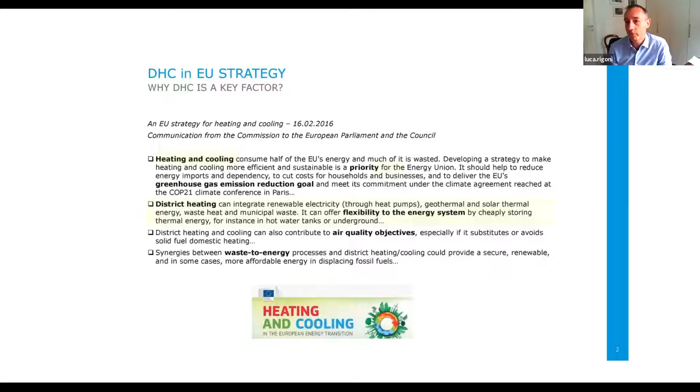We are now in a process where we have to fight against the climate changes. We have already increased our temperature by one degree, and we have to fight against the decarbonization of the sector. District heating can play a very important role, especially because it allows flexibility of the energy system, allowing the recovery of waste heat which is already available in the territory and is definitely not used. Obviously, district heating plays an important role in that part.

We can move on. The transition passed through the fourth generation district heating, which is also the one applied by A2A, and is really the major player in the recovery of waste heat.

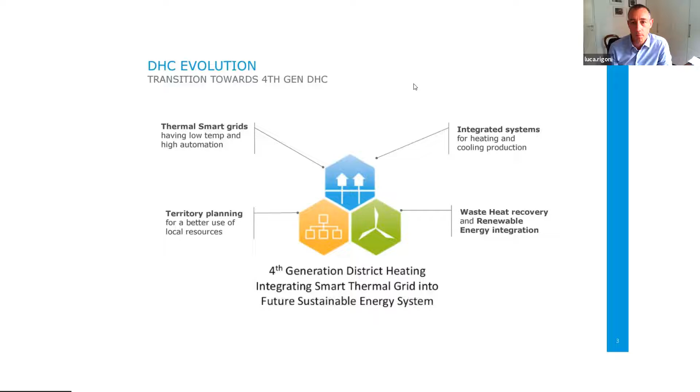Moving to the next slide, this is the definition. I would not spend a lot of time on that. The fourth generation's key point is really to allow higher efficiency, higher flexibility, and also the facility to integrate renewables and waste heat into the district heating.

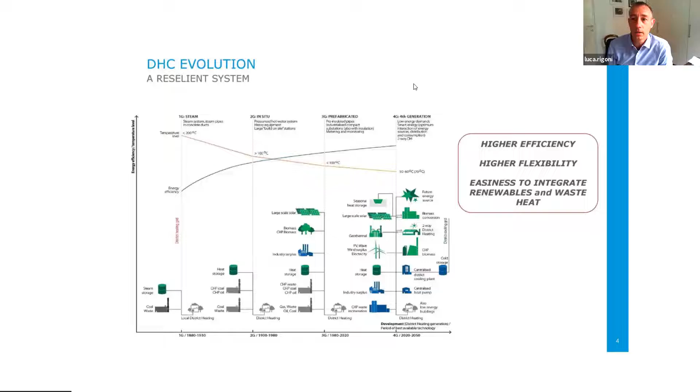And we are moving in that direction, as you will see from some cases I'm going to present in a minute. Next slide. I'm coming to this quickly - a result of the Stratego project, which was presented and developed in 2016.

This is a study with a scope to develop a low carbon heating and cooling strategy based on a heat density concept. This study mapped a certain area, especially where we have quite deep mapping of the area where our network is installed, in Milano, Brescia, and Bergamo. Through that, it's quite interesting to mark the fact that the target of this scope was also to establish or evaluate the potential of the waste heat available in the territory.

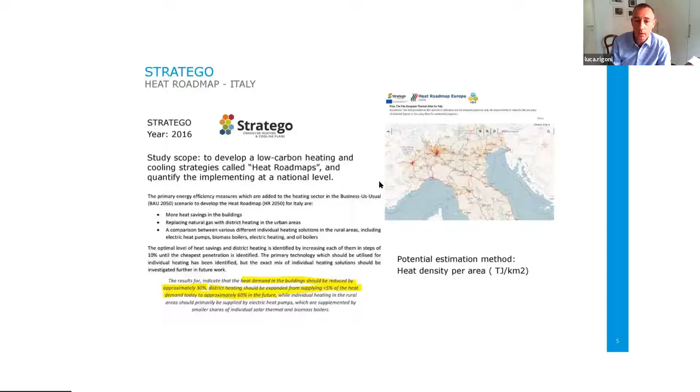Move to the next slide, please. Coming from that, you will see the numbers are quite impressive. The result of the study says that in Italy, in terms of industrial excess, we have around 95 terawatt hours per year which are now dissipated in the atmosphere but can be recovered. So it's really a huge flow of waste heat which is available, and just some of this heat is really ready to be grabbed.

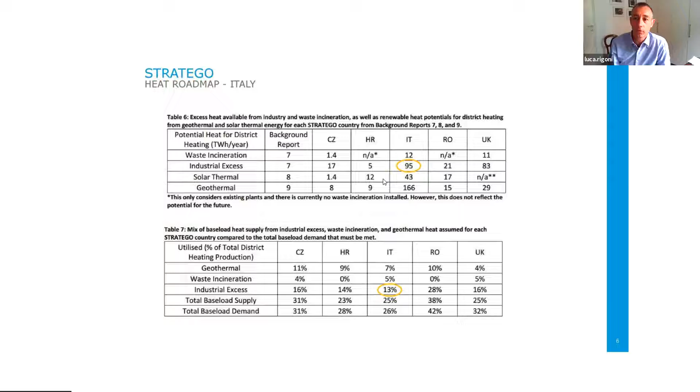This study gives us some sort of a guideline, a light in the night, showing where we should focus our direction in order to try to recover this heat. So coming to the next slide.

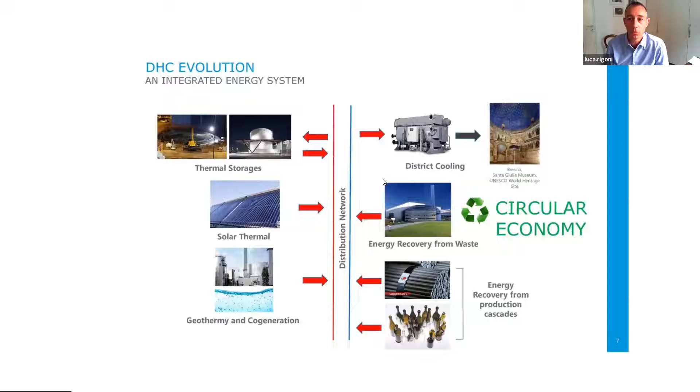Our system currently is already fed by a lot of different technologies, starting from thermal storages, solar thermal, geothermy, really recovery from industrial and production cascade, from waste to energy units, and we also couple the district heating with district cooling. Our system is already designed to accommodate all these contributions. Coming to the next slide.

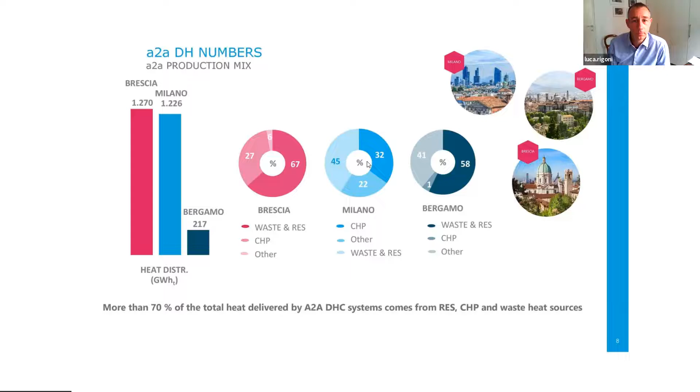So now let's see the cases which allow this high percentage of heat recovered above the heat distributed to our network. The first one is a project that we are now delivering in Bergamo, the third biggest city in Lombardy and one of the biggest in Italy.

We have set an agreement with REA, a waste-to-energy producer. This contract says we can recover all the capacity they currently have in terms of waste heat and deliver it to the district heating. The plant has been in operation for many years, but they don't recover any heat. They have an air condenser and basically discharge all the heat to the atmosphere.

Through this agreement, with a new steam tail, a new part of the plant installed and built, we are able to recover all the heat that is now condensed to the air. To do this, we have to install a 5-kilometer pipeline routing the heat from the production center to the city of Bergamo, which is not far away.

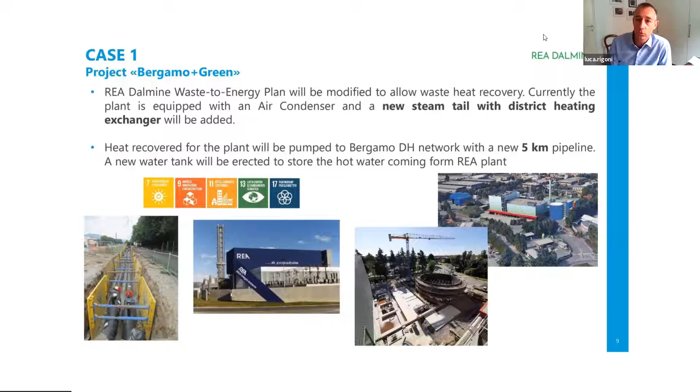We can move to the next slide. So the project, basically the value of the project is around 15 million euro in all.

The major KPIs are the fact that we will be able to increase by 50% the heat available for district heating in the whole city of Bergamo because of this heat recovery. We are going to install 22 kilometers of pipe in the city, and increase around 11,000 flats served because of this recovery.

The major numbers are, as I said, 15,000 tons per year in CO2 emission savings, and we are going to recover more than 90 gigawatt hours per year. You can see the equivalence in the lower part of the slide.

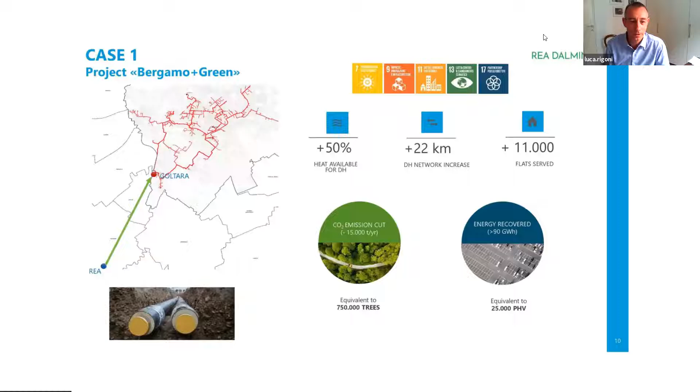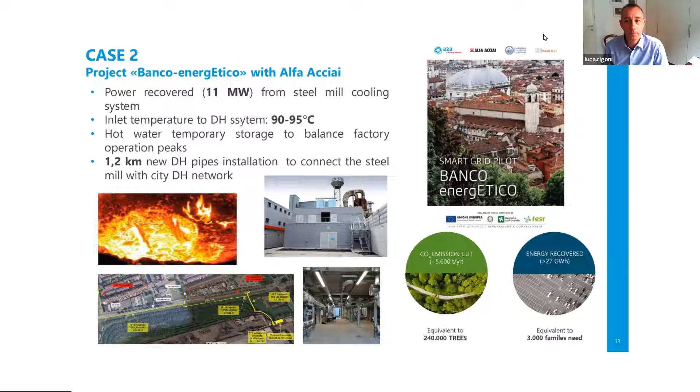Okay, we can move. This second one is again an industrial recovery, a heat recovery from a steel mill. We are going to recover 11 megawatts in terms of power, which will be around 27 gigawatt hours in terms of energy, with a CO2 cut of around 5.6 kilotons per year.

This is really a showcase project because we are recovering the heat as it is without any lift. We're recovering a 90 degree flow without making any lift to a higher temperature, and we are pumping this heat at this temperature level into our district heating system as it is.

The project considered installing, again, 1.2 kilometers of new district heating pipes to connect this steel mill, and a big pumping station in order to balance this flow into the network. This is the real challenge, because our network is at 120 degrees.

Because of this, we are really trying—if you remember the first slide—moving to a lower temperature network in order to push on this type of recovery, which is normally at a lower temperature. You can move to the next slide.

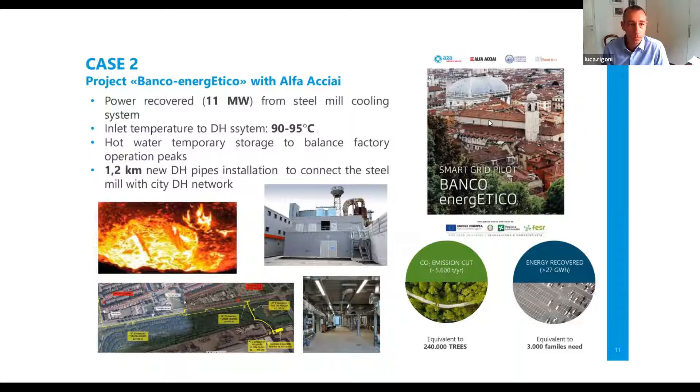Move to the next slide. Okay, I can see it. Okay, now I see it.

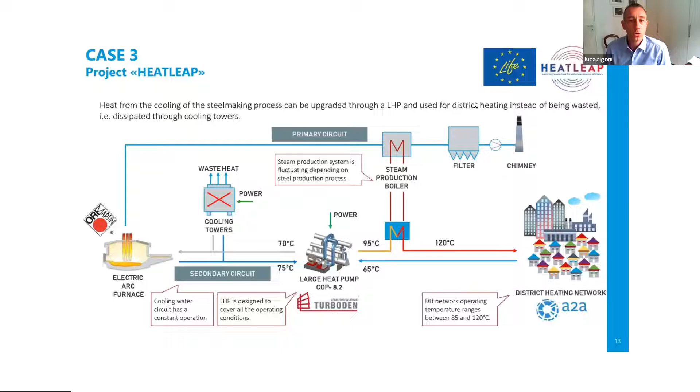So this is again a heat recovery from this steel mill factory, but different from the previous one I showed you: here we need a lift of the flow that we are recovering. In this case, the temperature of the cooling system is lifted through a large heat pump from 70 degrees to 95 degrees, and then with another system, we lift it up to 120 degrees, which is the temperature of the district heating network connected to this steel mill.

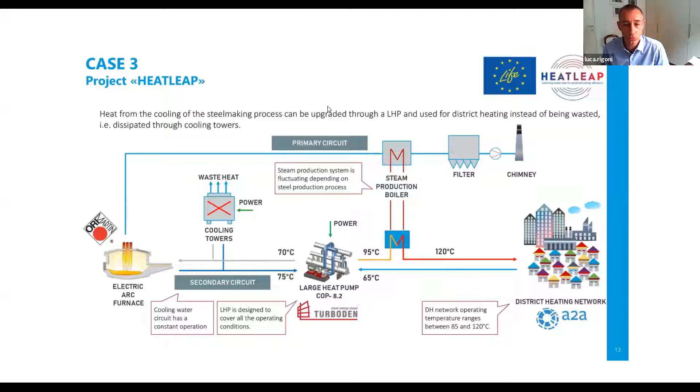But the concept is still the same: we are recovering the waste heat used to cool the process of steel production, and instead of throwing it away through cooling towers, we are recovering it and increasing the temperature in order to allow perfect integration into our system. You can move on.

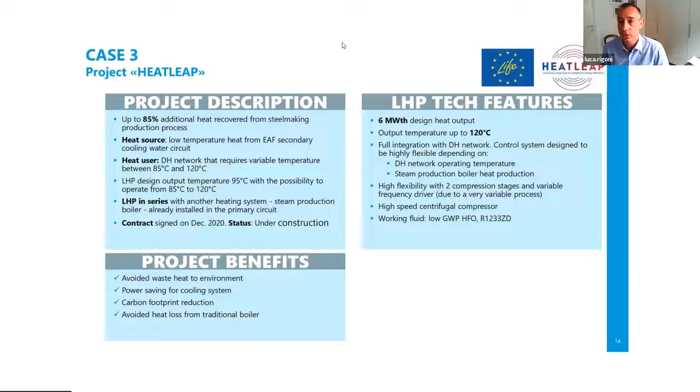As I said, these are the major KPIs. We are talking about 6 megawatt power, and in this case we are lifting up to 120 degrees. The important thing is that we are recovering nearly 85% of the heat produced by this steel making production process. So we are really reducing to a minimum the waste heat which is left to the ambient. Okay, you can move on.

All this kind of project requires flexibility from our side. The flexibility, as I was telling you before, can be done through a water storage, a heat storage. The heat storage is really a key component in order not to create any concern or any interruption to the industrial process which is above our recovery. And this is the reason why we are investing a lot of money in erecting new heat storages in all our network.

We have selected an atmospheric heat storage concept, which means that we will be storing at a temperature of 95 degrees maximum, because again, our aim is to reduce as much as we can the network temperature. And we are investing a lot in order to increase the capacity of storage.

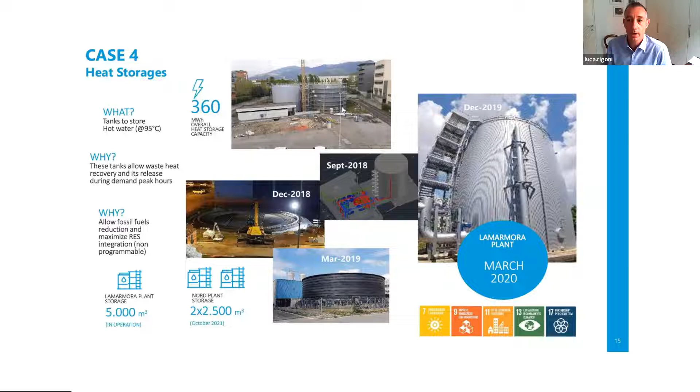Consider that now in Brescia, we are erecting 3 water storages, which in total will have a capacity of around 50% of the overall volume of the network in Brescia. And in Brescia, our network is quite spread. We are talking about 670, 700 kilometers of pipe in the whole city. So really, we are increasing our capacity a lot.

Then I come to the last case very quickly, which is quite interesting. This is a geothermal heat recovery. In Milano, we have some wells which are intended to control the level of the underground water, and the aim of these wells is to pump water from the underground and put it into a river. These pumps flow every day, 24 hours per day. So we have a huge flow of water thrown away without any energy recovery.

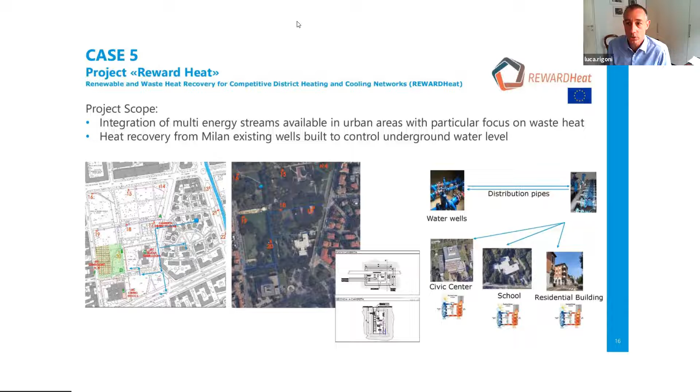So the idea is to use a part of this flow as a geothermal sink. We are now executing this project, which is again financed by the EU community. We hope to present the results in the next meeting, because we are now in the design phase and starting up with this new project. And I think this is the last one.

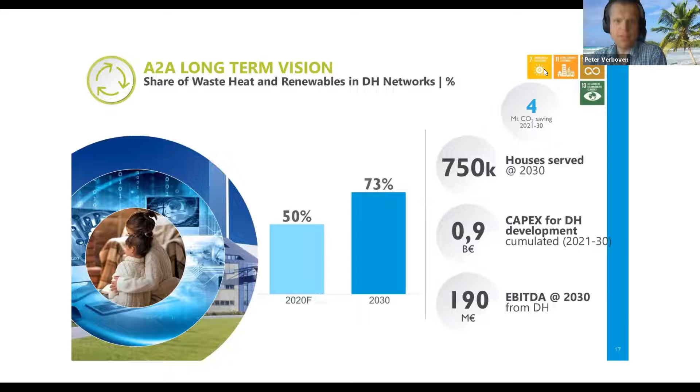Thanks a lot, Luca. As I said, very interesting overview. Very clear, covered all aspects, I think, of district heating and cooling. And I'm really curious to hear what Gilles is going to tell us about the case in Ghent, in Belgium, and how it compares to what we've seen in Bergamo.

Thank you, Peter, for the introduction. Indeed, a very interesting presentation by Luca. He has a lot of networks already in the ground. Here in Zelzate, we still have to start, so we have 0 meters of district heating in the ground so far. My name is Gilles Kinget.

I work at the Regional Development Agency of East Flanders, one of the 5 provinces in Flanders, and Flanders is one of the 3 regions in Belgium. So that's a complex introduction. As POM East Flanders, we try to be a catalyst within the energy transition. We initiate these projects. The basic idea is to couple supply and demand of heat. So in this sense, we have a lot of overlap with the R-ACES project and also a shared interest.

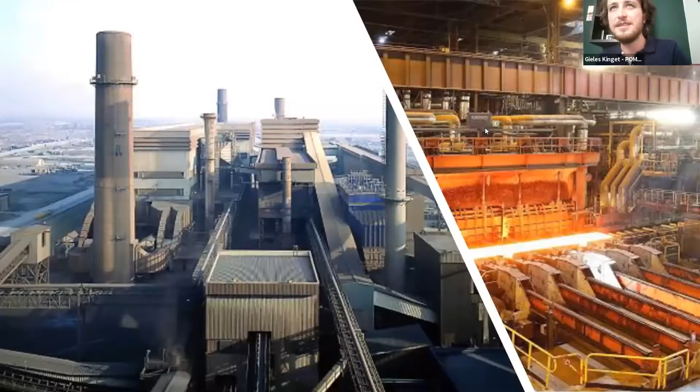ArcelorMittal, on the other hand, and I think you can go to the next slide, is really a very large company, 850 hectares. I think it's even bigger than the municipality of Zelzate. They are a fully integrated steel manufacturer. So they start from the resources, from the ores, just up until the steel end products. 3/4 of the CO2 emissions of Ghent are caused by ArcelorMittal. So it's really key of their process, of course. They are very carbon intensive.

And the vision of ArcelorMittal is to treat carbon not only as a fuel, but also really as a resource. And they have a lot of projects initiated, also financed by Europe, in which they try to make nice products out of these carbon emissions. Peter was talking about industrial clusters. Well, I think ArcelorMittal is a cluster on itself. So what we try to do here is to combine these two, the big giant ArcelorMittal and the small Zelzate, and then you could think of the next image, David versus Goliath.

We as an energy broker and a regional public authority try to help Zelzate to level out with this big giant, but I think this would give you a wrong starting position, using this image as a conflict between two parties. If you hold on to this, you would drastically limit, I think, the chances for a success due to a lack of trust. So rather, I would give the next image, which is, I think, very crucial.

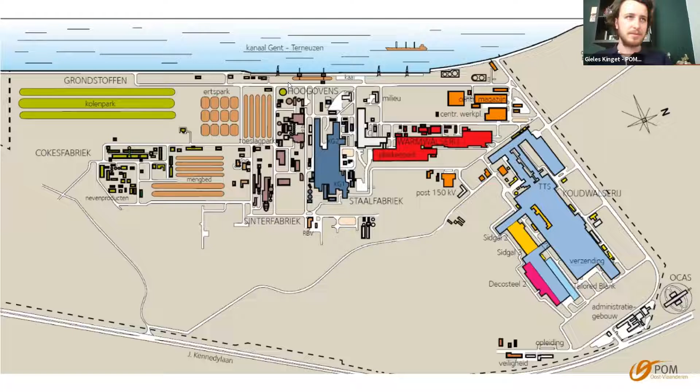And from time to time, we also involved some of the major developers of heat networks, really to have a sort of ping pong in an early stage to screen the viability of what we were saying and sometimes also promising. Next slide.

So after this first phase and getting to know each other, try to build this confidence, we started collecting data. I think that's, of course, the main ingredient. You cannot build a heating network if you don't have the demand for heat. So that's what we've done here. The biggest dot is a psychiatric centrum, Sint-Jan-Baptist, which is very close to ArcelorMittal, which is just on the south. You can see some contours of their buildings approaching there.

Next slide, please. After we've collected the data, we asked an engineering company to put out a feasibility study. So we said, try to make the dimensioning of the pipes, the trajectories, and here you can see some key figures also about the external heat delivery, because ArcelorMittal, next to this feasibility study, also did an internal study to see what sources can be used to deliver this heat network, at what temperatures and at what cost.

And that's when they come up with two, let's say, starting points, 2 times 10 megawatts of the place where they squeeze the big hot steel slabs, they call it, to cool these rollers. Otherwise, they would also melt. So that we had our source, 2 times 10 megawatts.

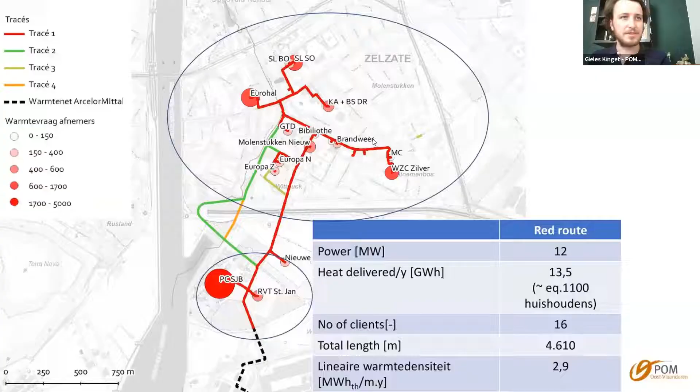I think those were the most, let's say, important obstacles that I've noted here today. I'm curious to your questions or any suggestions.

Yeah, thanks a lot, Gilles. This is one question from my side. What's the exact status right now of the project? So what stage are you in?

ArcelorMittal Ghent is putting out the request for quotation. So it's a design, build, maintain, part financing and operate all together. And they are in conversation with different parties, but they will now officially put out these requests for quotation. So that's for the network on their side. It's not for the overall network all the way to Zelzate. It's for the network on their side, the network to the psychiatric center, and also within this RFQ, they will implement the possibility to deliver to Zelzate as well. So ArcelorMittal is really thinking with us, they have to deliver and let the network grow towards Zelzate. So that's a positive thing.

I see another question here from Emilia, who's asking what happens with the waste heat outside the heating season.

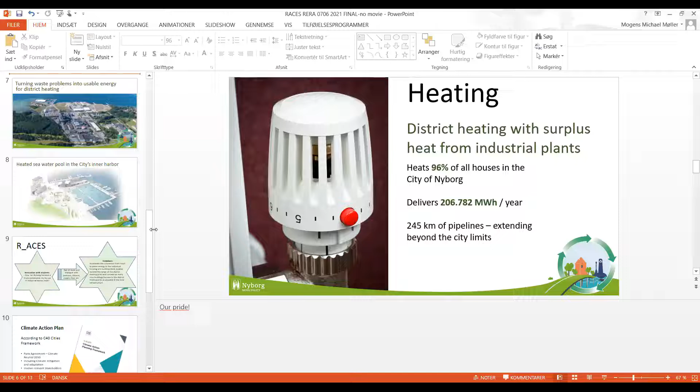Okay, just to give you a short introduction. You all know the map of Europe and Denmark, and the red dot is right on Fyn, which is the region we are positioned in. Nyborg municipality is a small municipality of 280 square kilometers, on one side of the Great Belt Bridge, if you know that one, with a population of 32,000, out of which 20,000 live in Nyborg city. Our main businesses are industry, agriculture, and education. So that's just to zoom in and give you an impression of where we are.

It's also a municipality with a strong international commitment. I started 1 month ago, but as I said, I've been cooperating with Nyborg for a number of years. It has signed the Covenant of Mayors, we're part of the Cities Race to Zero, and we were finalists in the European Green Leaf Award this year. We didn't win it, unfortunately. Recently we've also entered a national process called DK2020, which is building climate action plans along the criteria of the C40 cities concept, if you know that, I'll come back to that.

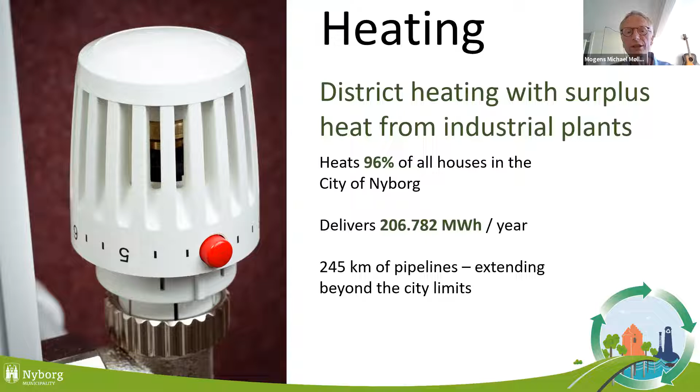So the surplus heat comes from roughly 2 companies, as I said. One is Fortum. Well, now it's owned by Fortum, but it was built as actually a public company back in the 70s, and they're still taking care of hazardous wastes from all over Europe and actually all over the world. It's transported to this plant where it's burned, and a lot of the wastes are actually fuels themselves, or they are destroyed by other means and by use of other fuels. So this is one of the main plants, and even back in the 70s, wise people built the system so that the surplus heat from this plant could be used in the district heating.

The other company is Koppers, which is a tar facility, an oil product. These two companies supply 96% of the heat. The city of Nyborg only has a minor capacity of heat production as a reserve and as a peak supply to take care of things in the deep winters, but the rest is imported from these two companies. Also, as mentioned by one of the previous speakers, it's a trade of sorts. The companies are not involved in the public authority or the public municipality at all, so it's simply shifted as a commodity in the process.

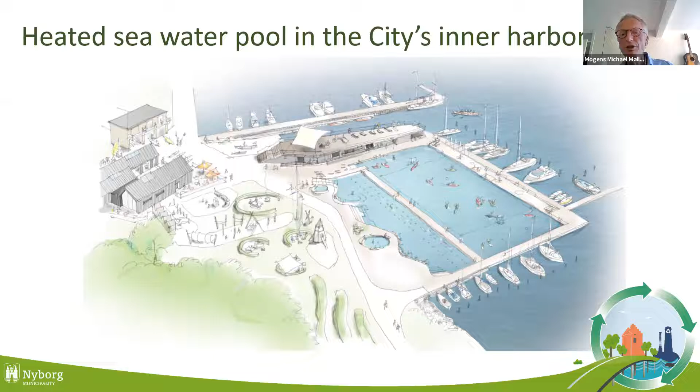In terms of curiosity, a more minor thing - we're also thinking of using some of the still excess heat to build a heated pool in the harbor on the coast, where the water could be 6 to 8 degrees warmer compared to the surrounding natural water. This is one of the plans being dealt with right now, which could make use, although it's a little extensive, of some of the surplus heat we still have. I'm not totally into this, but maybe, as also mentioned earlier, this could especially be useful during the summertime.

In terms of the project, we actually had another small action involving students. I mentioned that we're an education town. We engaged with the local high school, which has a line of students that work with building new companies. So we thought, why not use the innovation capacity among the students? We challenged them: how can we use the existing overshoot of heat that we're still not using? The course hasn't been run yet, it will be this autumn, but it might give us some new ideas, and at least it will give them some impression of what is going on in Nyborg and how the excess heat is being dealt with.

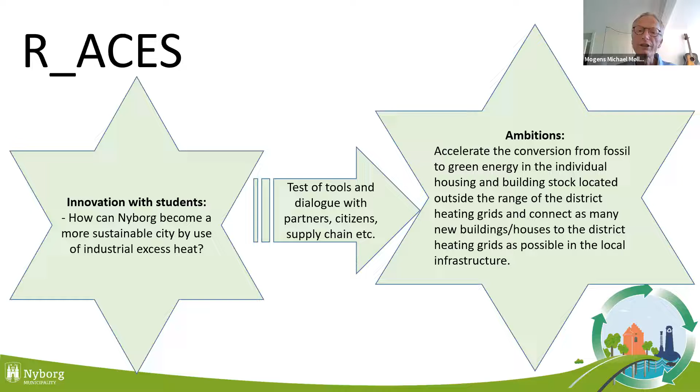As I mentioned, we also entered DK 2020, which is a movement of more than 40 municipalities at the moment in Denmark, out of I think 92 or 93 municipalities, who have engaged in this process of building a climate action plan according to the C40 cities framework. The C40 is a gathering of some of the largest cities in the world, but also including Copenhagen and others, that have agreed on a specific framework for climate action plans that you can be certified in.

The basics are that you have to acknowledge the Paris Agreement and plan for climate neutrality in 2050. You have to include both climate mitigation and adaptation, because we know there are climate changes and also changes in the water circulation. And you have to involve relevant stakeholders. This is, I think, where it comes in that we are also planning to build a stronger ecoregion, you could call it, in cooperation with our companies in the municipality.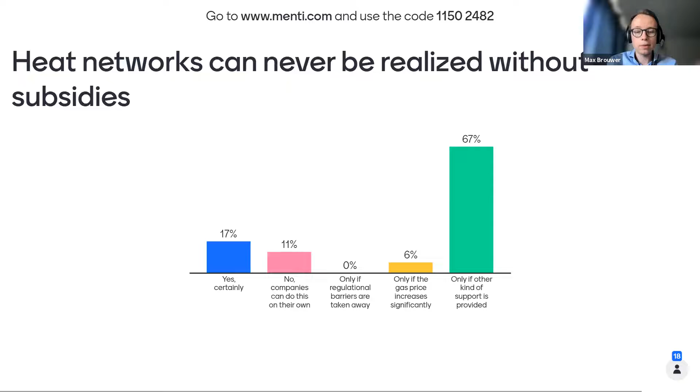Feel free to speak up, so you can maybe unmute the microphone. Hi, I think I accidentally filled in 'yes, certainly,' thinking it can be done without subsidy, but an insight I wanted to share is that subsidy can help create better projects. Without subsidy you pick something that gets the best return on investment, but if you introduce other incentives such as a subsidy to connect more buildings that are maybe not ideal for district heating but could benefit a lot from it, I think subsidy can help a lot — so to say, not only do the cherries, but also make a bit more connections.

Yeah, that maybe contrasts a little with the position that 11% of you took, that no, companies can do this on their own. So I don't know who represents this position.

So that's two people who picked no, companies can do this on their own. If one of you could unmute, we could hear what you think and why you think that. One was me. Okay, no, because...

Currently in Italy we don't have any subsidies to develop district heating networks, and still we are increasing our installed base, therefore we are used to that. So in the past we had some subsidies, but currently we have none.

Yeah, and do you, because it's a very different situation from the one that I know, do you have an extensive gas network in Italy? Yeah. Then how does that work? Because maybe first, Mogens Michael, you raised your hand.

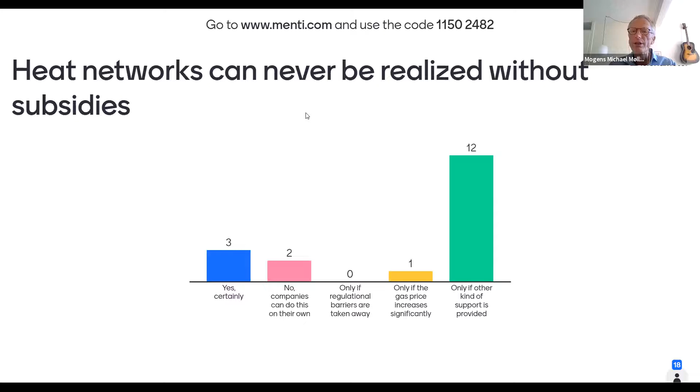So I was one of the, pointing to, only if other kinds of support is provided, which is first of all some facilitating of the process, but you also, at least if we define heat networks in the sense that I said, need to have some sort of structure where a long-term investment can be made by a public or public-like organization in order to build the heat network. But if by heat network you mean an exchange of heat between two companies, then of course it's a different story. Yeah, I see that with most people it was the same idea, that you need other kinds of support.

And only one person indicated that the gas prices need to go up significantly. So who was that one person? Actually, that was me. I think that in general, if you just have a strong business case, and if people really can earn money with it, you don't need subsidies. So make the alternative more expensive. Yeah, of course you would still have the problem of the long investments. That would be sure, so...

Yeah, okay, other people want to weigh in on this one? Feel free as well to intervene. We're trying to get a little bit of discussion going here, so there's no need to silently wait until I ask for your specific category or name. Feel free to intervene if you've got elements to add, thoughts that you want to share with the people here. You can also post them in the chat window, and if not, we will move on to the second question. I would be really interested to hear how Giels thinks about this for the ArcelorMittal case. Does he think that the case would be possible without subsidies?

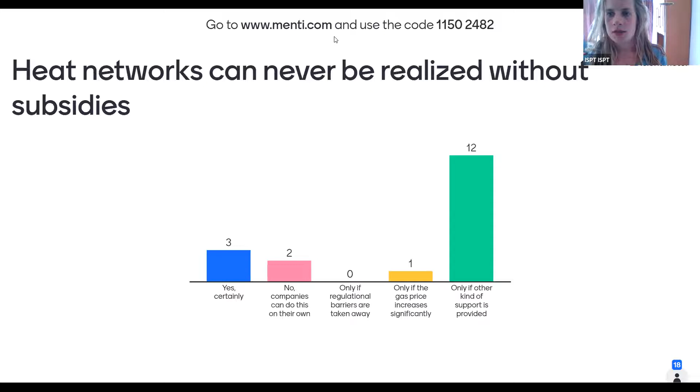Yes, some cases are possible. The low-hanging fruit will be realized with or without subsidies. But as pointed out before, if you want, let's say, a bigger whole, or you want to reach more clients, then subsidies can come in handy, or other help. And in that regard, raising the gas prices would also be a help. So I think this is not an or question, but and.

But I also voted on the last category, so I'm one of the 12. And I can fully agree with what Mogens Michael said. Yeah. So I wonder if I could just jump in, Peter. I must say, I'm one of the 12, but maybe a nuance here is the size. Although it seems like the network Luca is talking about was very large, if there's only one or two companies going to a community or one general receiver of energy, then possibly that can be done with less or minimal support from the government.

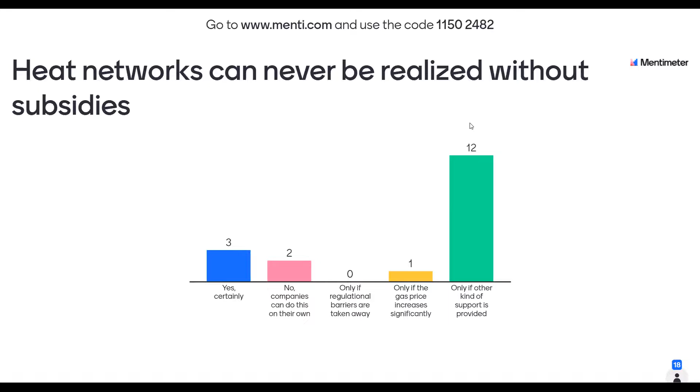But in my perspective, because I work so much on innovation projects and so much with government support for innovation, just the development of new technologies, which then in 10 or 15 years can be implemented, that's very, very commonly done with some kind of subsidy from the government. So that's why I definitely chose the last one.

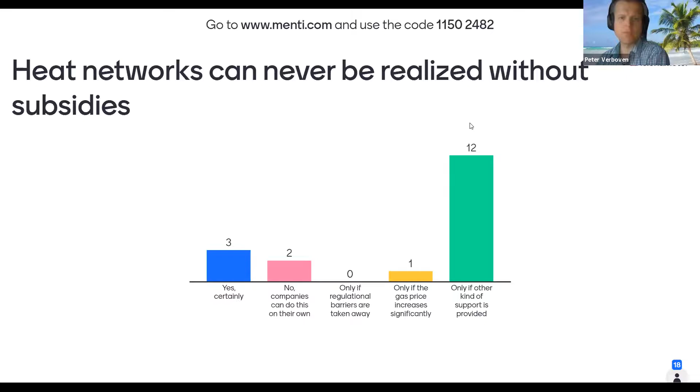Okay. Yeah, well, I think in general what we're seeing probably reflects the fact that many people come from countries or regions where district heating is not as developed as some of the cases that we've seen here, of course. Maybe Krista, it would be a good time to move on to the next question. Yep. So this one should be interpreted as: the focus on individual optimizations eliminates the options for realizing shared heat networks. So is it either individual optimizations or heat networks, or can they exist side by side?

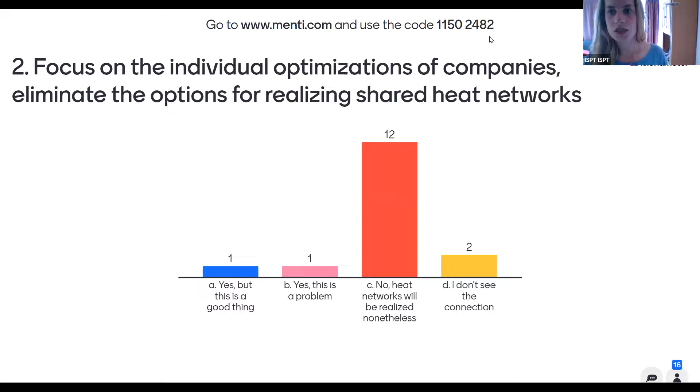So even if you have optimization within companies, in one way or the other, there will be waste heat. There will be some waste heat anyways, a lot actually, that can be used for district heating networks. Yeah, that's definitely what we saw in Denmark as well. Yeah, I was going to say something like that.

You can never optimize the processes so that you won't have excess heat in industrial production or even in data centers, as you mentioned before. I think about 90% of the energy is transformed into heat, which is a general thermodynamic rule. So there will always be excess heat. The fact is that many of the industries, of course, their core business is not to produce heat, but to produce all kinds of things, whether it's data or it's steel or it's plastics or whatever it is.

So this is also why I voted for the option on you need some facilitation in the previous question. We have for several years, maybe 5-10 years, worked on surplus heat from minor companies in Fyn, in the area where I live. And I was in charge of that. And we've talked to many companies. And at least in Denmark, it's always a persuasion of the company, because to some extent it's a little hassle for them, because it's not their core business, and they are striving to be competitive in their business. So even with the favorable framework conditions we have in Denmark, you have to persuade them and

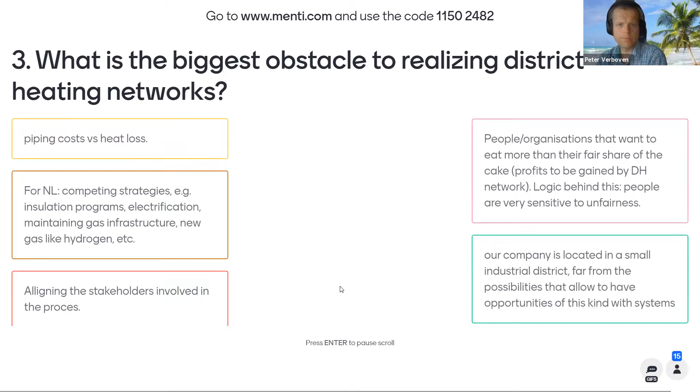Peter, I maybe want to add something on the previous question. That's allowed. Go ahead, definitely.

I think I was confronted with the opposite situation, in which a company gives away a bit of its private or personal efficiency for the network. Of course, not for free, but ArcelorMittal has its own internal steam network, and they offer this as a backup when the installation has to be interrupted, for instance. The steam network will be the backup. So in this sense, they will lose a bit of their internal efficiency for a collective purpose in a way.

And the cost, of course, is their gas price or their steam price. So it's linked to the gas price. But I think this is also an idea that you can play around with installations, and you might be able to discuss this as an opening for a collective network.

And was that because you feel they are being forced by regulation to do something about their CO2, that they are willing to think about those kinds of things? Or are there other reasons for them being so generous with their steam? Yeah, they have to be able to make those guarantees. And of course, CO2, they are part of the emission trading system. And by delivering heat out of their borders, they can, I think, regain certificates for CO2.

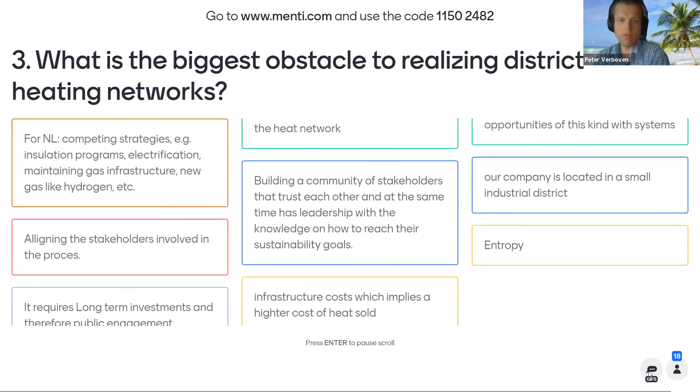I also understood that it becomes so boring in the end that most people simply forget about a district heating and cooling system, which would, I think, be the ideal, of course. If it's so normal, so natural that nobody even thinks it worthy of a thought, then it would be great. And finally, of course, the entire issue about trust and governance and being able to build an entire team of parties that are willing to be on the same page is really essential to making it happen.